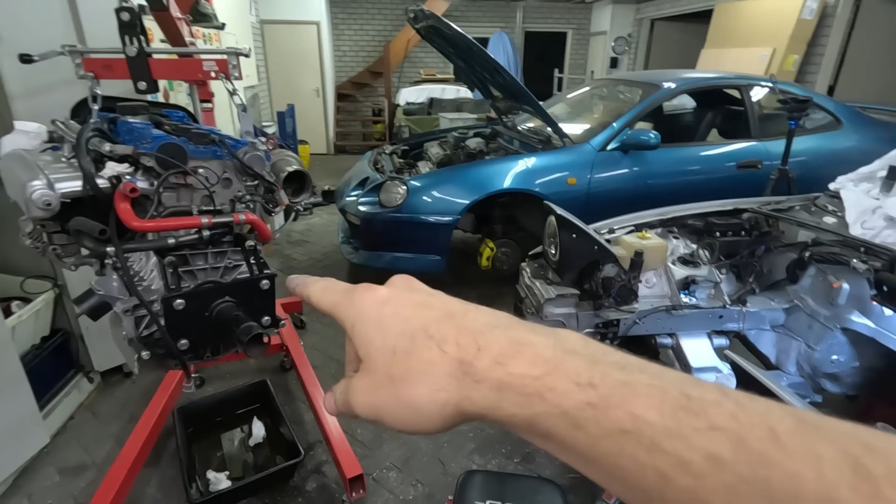It might not look like it yet, but today we're gonna get this engine in the car and get this car on its own power, driving out of this garage. Let's get to it.

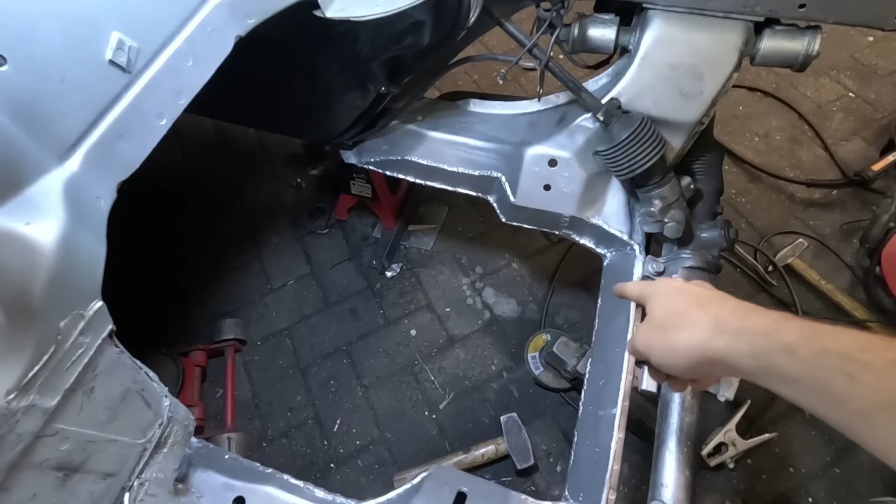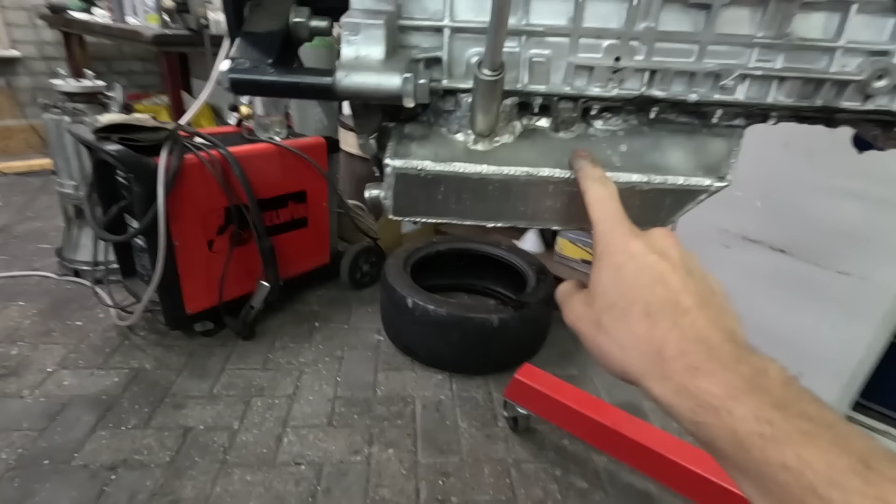Last time you saw us take out the engine and make the brake lines. Thijs has also welded up the subframe, so that looks all nice and neat now. That's actually structurally rigid. And now we can actually put the engine in for the first drive. But first I have to reseal the oil pan. And I'm also gonna 3D scan it. It's not important, the resealing, so I'll just show you guys the scanning of the oil pan.

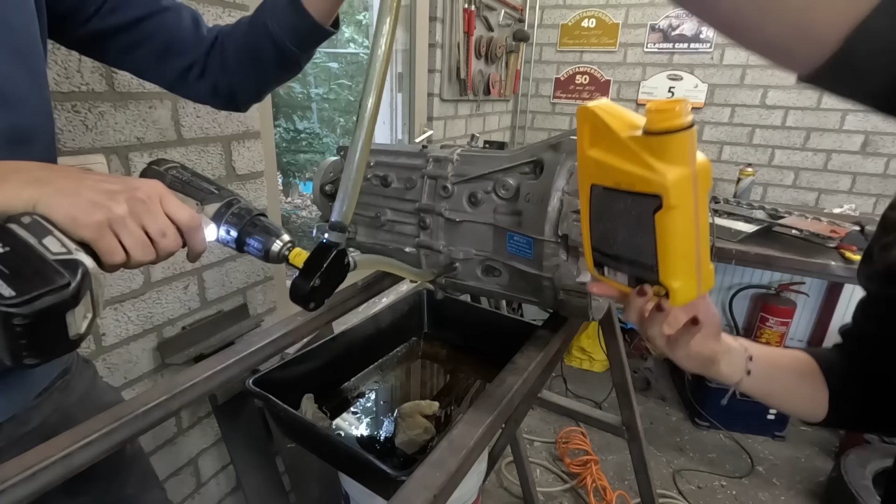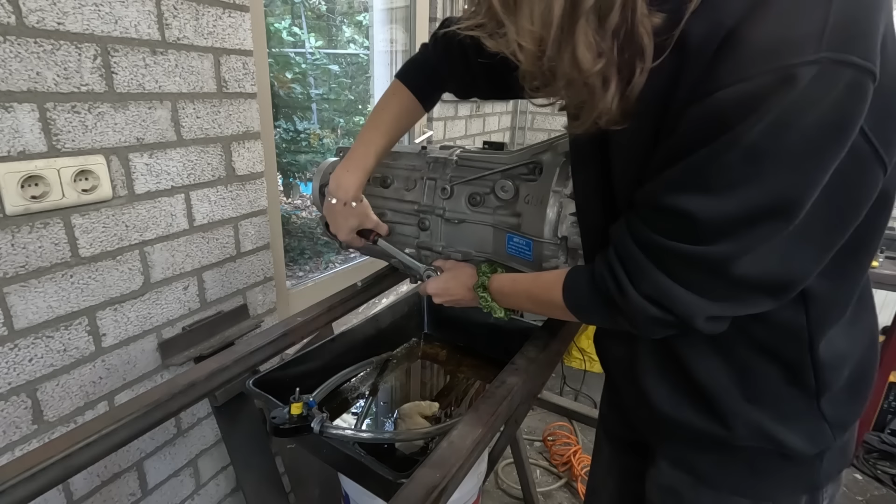That's the new fluid into the gearbox. Use one of these pumps where you can put your drill on, and that works quite good. These gearboxes actually have a lifetime oil, so no need to change it. That's what they say, at least, so they can sell you a new gearbox once it breaks. But they do have a fill and a drain port, which is perfect because we just changed the oil on that, and the oil that came out was actually pretty good still, so that's nice to see.

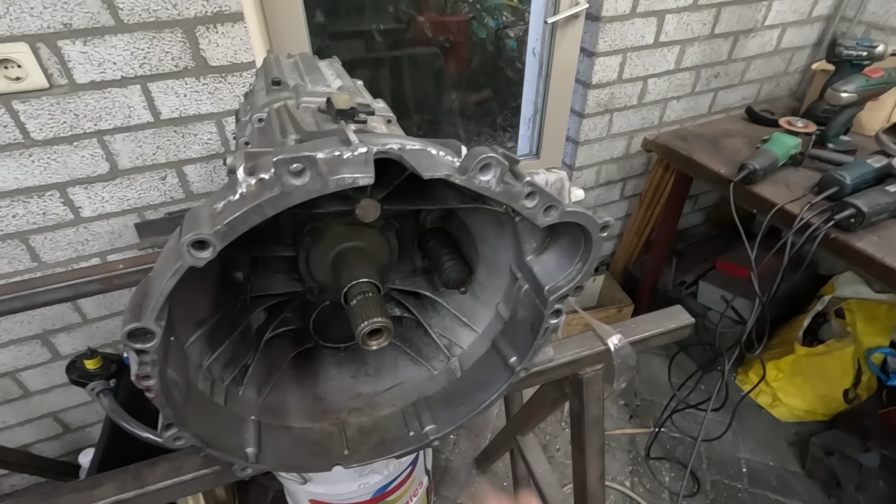The gearbox is now ready to go on the engine with the clutch and the flywheel, so I'll put the engine on the engine crane so I can get the flywheel on, because that's currently not possible, and torque that to spec.

In the first start video you saw that we had some leaks coming from the front of the engine. What I did off camera is actually undo the whole oil pan. What I found out is that the front two O-rings weren't seating properly, even though I mounted the oil pan like this, perfectly perpendicular to the block like it was stock. The O-rings unfortunately didn't seat, so I welded on some more material and made it flush so that now the O-rings will actually seat up to the block correctly, and that it'll seal. So off camera I redid the oil pan and resealed it with Dirko, which is high temp sealant, especially made for oil pans like this.

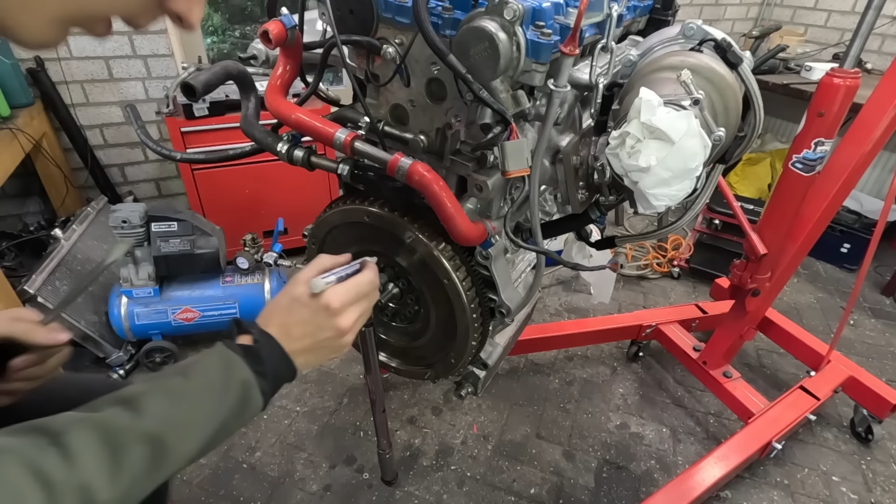So these flywheel bolts are actually 45 newton meters and then 65 degrees. So I've got the angle finder here, and you guys tell me when it's at 65 degrees actually. Oh, I really don't like doing this. 65. Ooh.

So I actually ended up putting a breaker bar at the front of the engine with the giant 30mm nut on the crank pulley nut. And this way I can actually do this alone, because the last 5 degrees are pretty hard to get. And I already did 2, now this one. So the first part is pretty easy. There we go, 65. That marked the rotation.

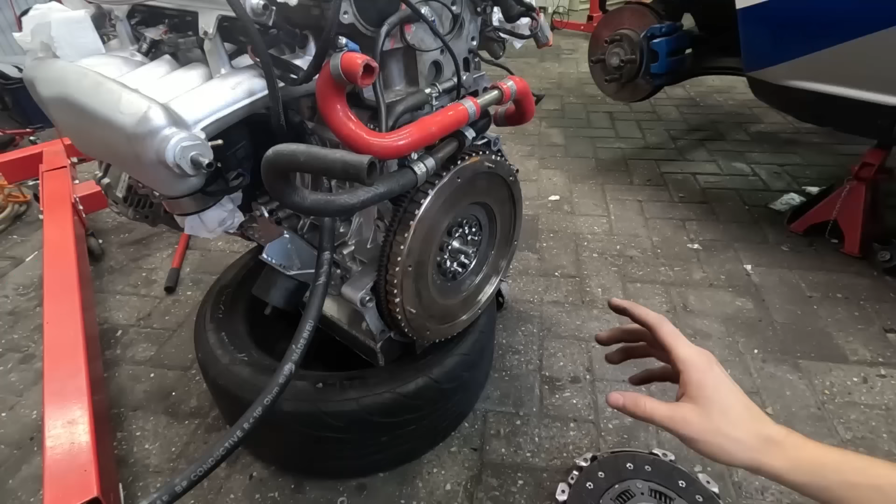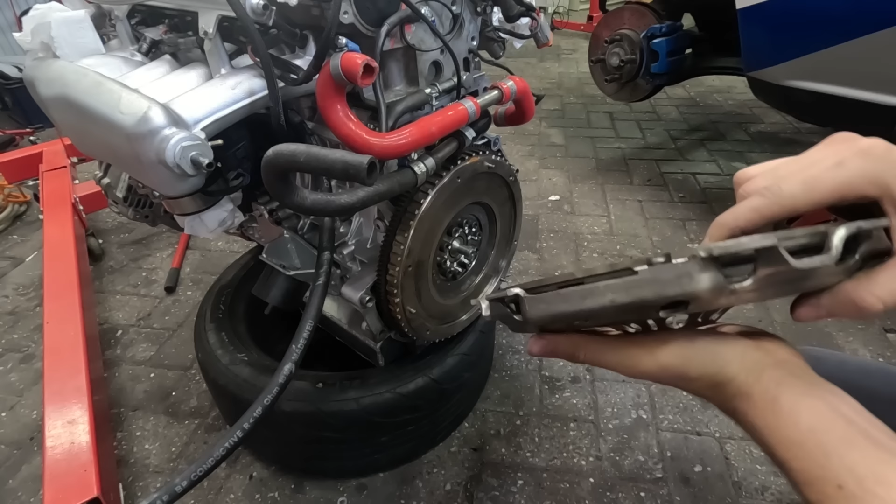This is my clutch setup. It's a Valeo original Volvo 5-cylinder flywheel. It's a single mass converted one, which actually came with the engine, and it has the pressure plate also from the Volvo, as you can see. And in between those, because this is a 240mm clutch setup, I'm using this 240mm clutch disc that actually has the splines for the BMW gearbox. It's actually out of a different BMW, out of an X3, I think. Here's the part numbers.

Because this is a single mass flywheel, I'm using a sprung clutch. Some of the clutches that come with these BMWs are actually unsprung, so I got the one that is sprung, and this should have some pretty nice driving characteristics. To install this clutch, I've actually 3D printed this little tool which slides over the pinion right there. I needed that pinion because it goes into the bearing inside of the shaft of the gearbox. So the clutch disc actually has Getriebeseite on it, which is gearbox side. Slide that on like that. And slide this on like this.

The thickness of this clutch disc is actually about 1.5 mm more than the one that came off the Volvo that was in here, which was new. So to get the same amount of force from the pressure plate, I'm actually spacing out the pressure plate from the flywheel using a washer in between the pressure plate and the flywheel side. So this gives it some more space, so it actually disengages like it did with the Volvo disc, and also engages as it should with the same clamping force, because these are actually the same size as the difference in between clutch discs. So there you go, there you can see the spacing ring. So put that on.

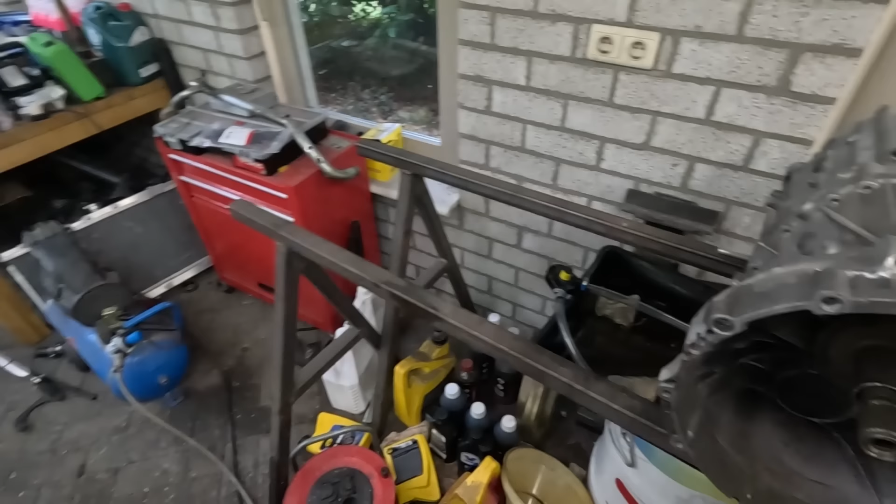Don't do any high load stuff, like no pulls and no hard driving, but I want to confirm that this works before I actually weld the inside, because if I cut it here now, I can still retain the perfectly flat surface, and work from there if I need a different gearbox or something totally different. So we can drive on this, but can't do any pulls or hard driving because I don't want to break these welds. Should be fine for now.

We're going to take out the gearbox, maybe with the engine, don't know yet if just the gearbox or the whole engine setup. And we are going to weld this once we've confirmed that it works. So this is a hard decision I have to make, and I'm taking it cautious because this swap so far has cost a lot of time mostly, and I want to do it right and make sure this concept works before I totally commit to it.

So yeah, let's put the fork on now. So this is the fork, actually clean it a bit because it's still quite dirty, and a new release bearing which goes on like this. One thing I want to check is to see if there's not too much preload on this bearing when it's hitting the pressure plate, because that's how I mounted it when I was originally designing the gearbox adapter thing, and it shouldn't have too much preload because I don't want to slip the clutch.

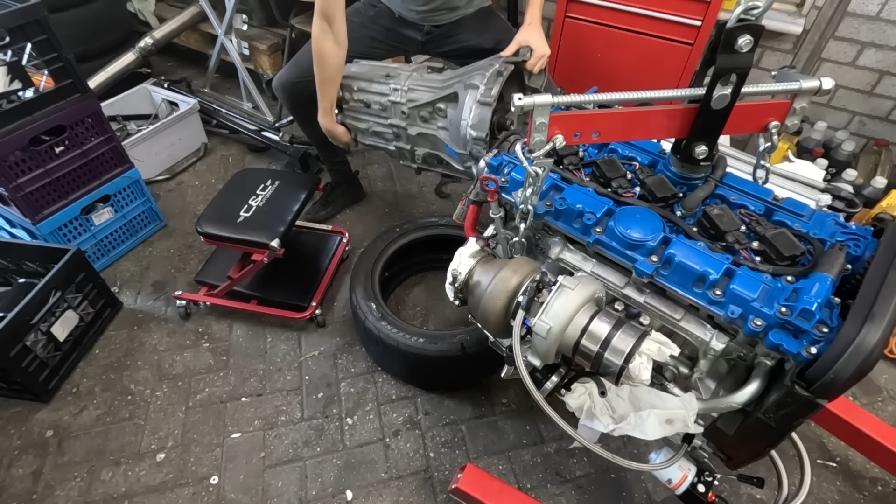Woo! Why did I go for such a big gearbox?

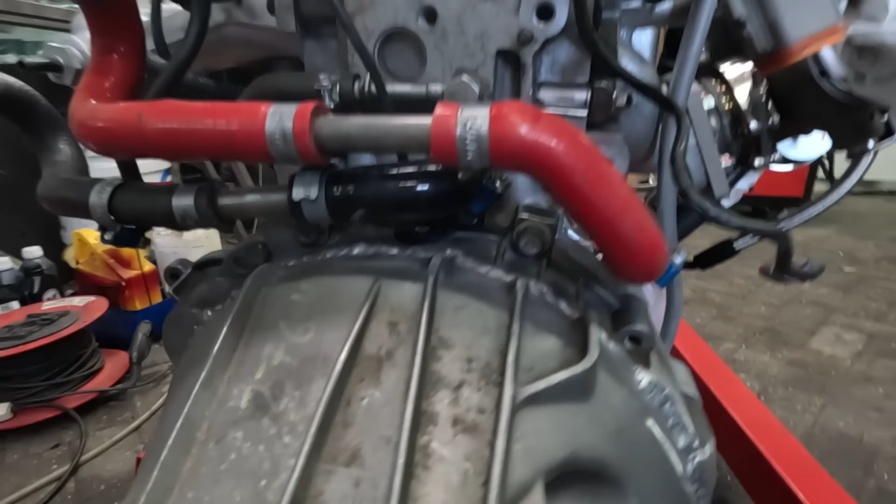One of the things that you don't see often with engine swaps is the time that people take to make it all serviceable. Take for example the bell housing bolts. These are 14mm hexagon ones, but when I was mounting this all, I had some, what are they called, internal hex ones, which are basically these Inbus. So these are the correct length for the ones on the side. So to get that all correct, I got my holy bible, I guess.

I made a little template of the back of the gearbox, and they're all hexagon socket 17mm. So now it's all the same, and this makes it so much easier to actually go and take off the box when I actually need to do that in the car. Also painted them so they're a bright color and they stand out for when you're looking while your box isn't coming off and you see one more bolt.

So all of these old ones, the 14mm ones, can go out. I didn't want a combination of different sockets and stuff, so it should be a lot easier to take the box out later if that's ever needed.

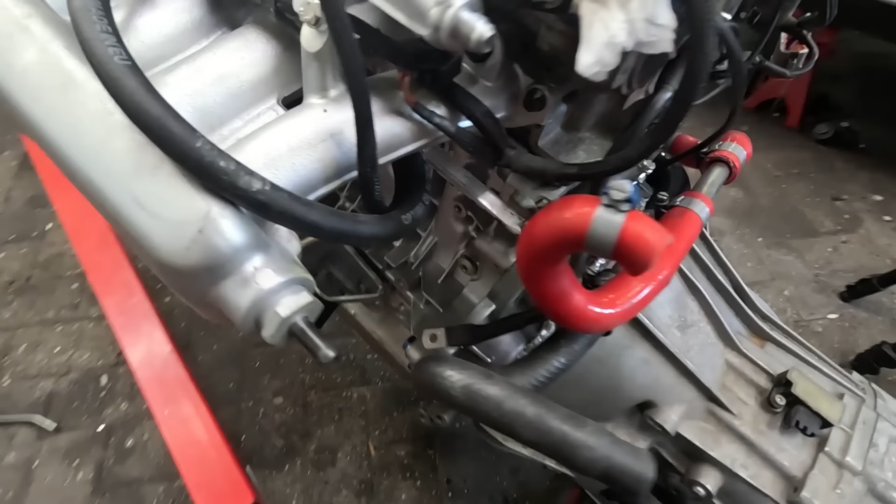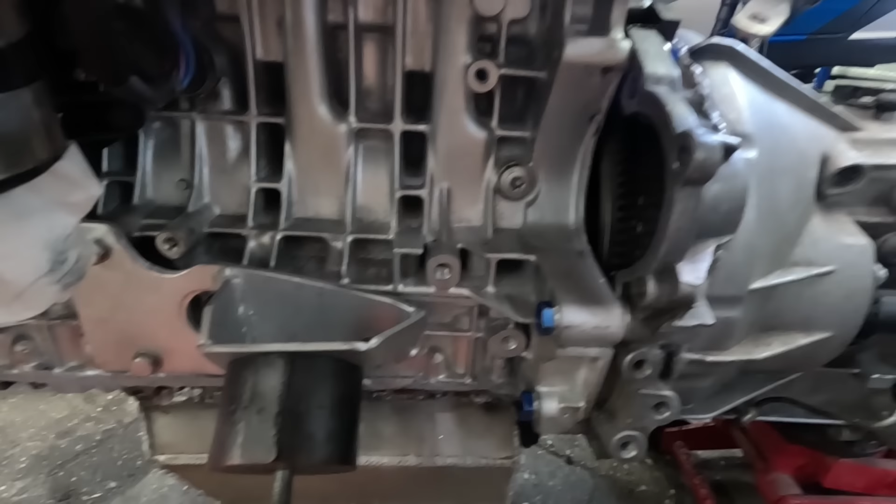Now time to get the starter on. I just checked the preload on the slave cylinder, basically pulled it out to see if it's the same tension as squeezing it with my hand, putting it on. So it's pretty much perfect and I'm happy with that. So we're just gonna send that and put the starter on right now.

Ah shit, here we go again.

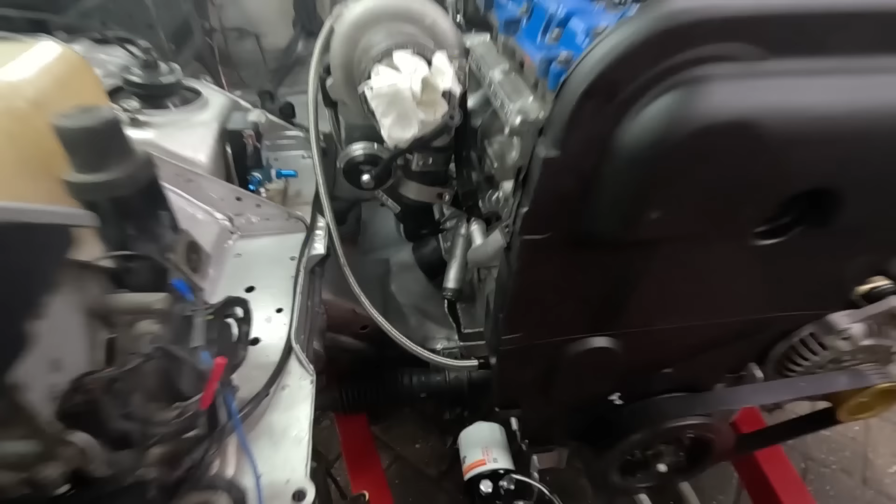That's the poly engine mounts as well in there. They are Shore 85, I believe, on both sides. They made it slightly harder to get the engine in because those mounts are actually 2 millimeters taller than the rubber ones. I think the rubber ones sagged over time. So this should be a bit more clearance to the sump as well.

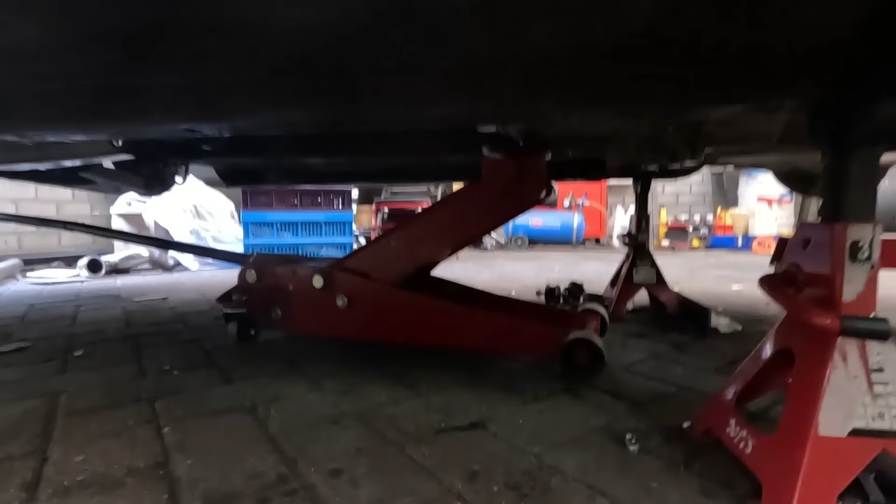And hopefully the hood still shuts. We'll make sure later. But the engine's in, at least on the engine mounts. Now I've just got to do the gearbox mount on the bottom. With the gearbox also mounted, this is still on rubber blocks. I'm going to attach the shifter, which goes to the knob at the top of the gearbox. And I should be able to shift the gearbox now.

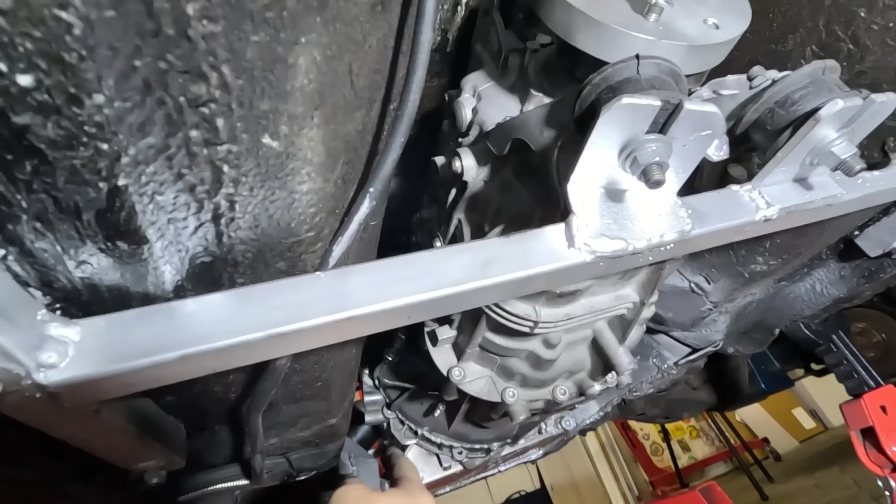And next up, before we connect anything else to the engine, is to hook up this clutch line, bleed the clutch, and check if it disengages the clutch with the actual pedal. So it's basically building pressure, pushing the line, pushing the rod in, and disengaging the clutch, and then this is now in gear. We should be able to move this by hand when the clutch is pressed, and then it's back in gear just like this. It's locked, and I should be able to confirm that now, which is pretty cool.

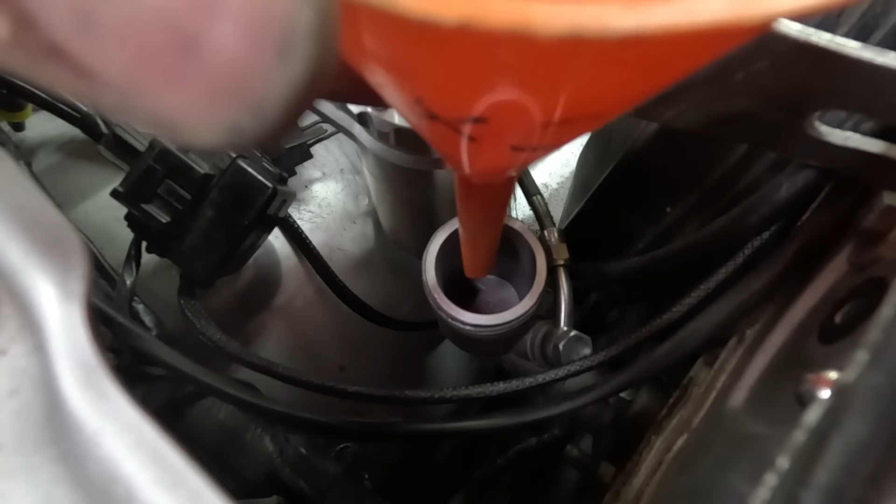The gear shifter is now connected, as you can see, and now the next step is to hook up the clutch line. First self-bleed it, which basically means to fill the canister and keep pumping it until it back feeds into the line. And from there on we're gonna put it to the gearbox, to the slave cylinder, and it should be working. Let's see if there's any leaks. I hope not, but we'll see. This should work. I'll pump the clutch now. See if this works.

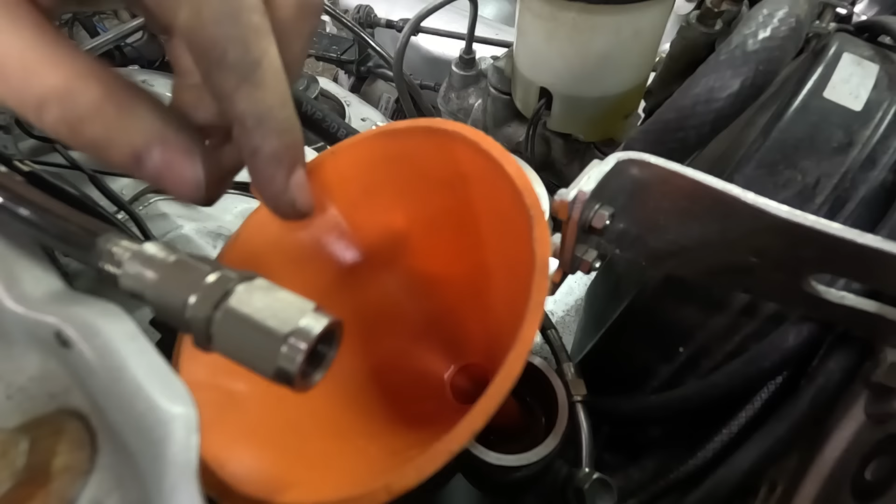Oh! Basically shot at the firewall. Shit. Let me get some towels. Brake fluid. This is really nasty stuff, so need to clean it out as quick as possible. This will eat your paint and stuff.

See if there's still enough in there. Fill it in a little bit. Ooh, that's way too much. Whoops. Let's see how far it's dropped. Pretty much nothing. So that's way too full. Whoops. Then next, gonna tape up the end. I really don't want that to leak all over everything. There we go. Put this down to the gearbox, and we'll bleed it from there.

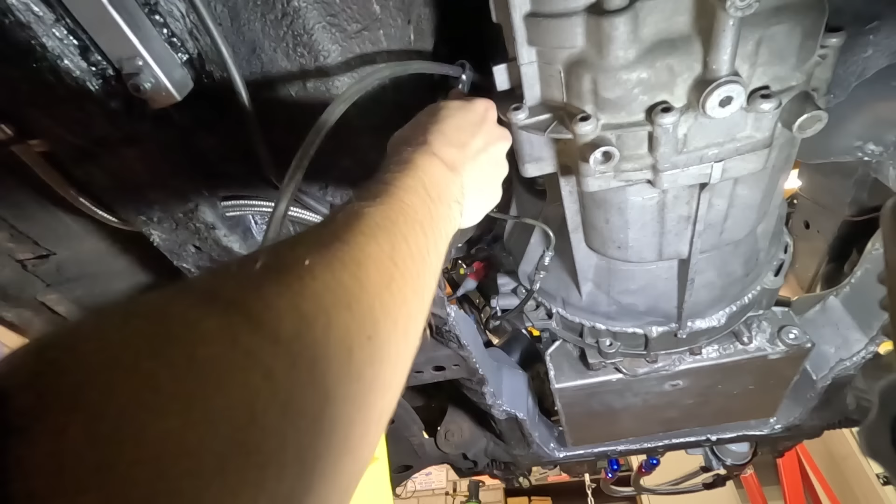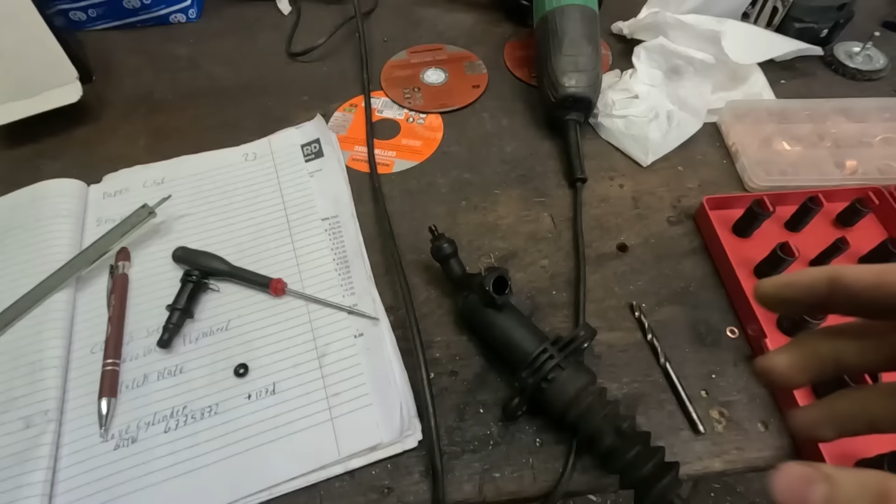Piece of shit was leaking there. This is the slave cylinder from the BMW gearbox, and it has one of these, which is basically a damper inside. So when you push the clutch, or when you let it go actually, it limits the amount of flow. So I deleted that part inside, so it's realistic, so you can actually clutch dump it and stuff. But it has this small O-ring in there, which is actually upside down.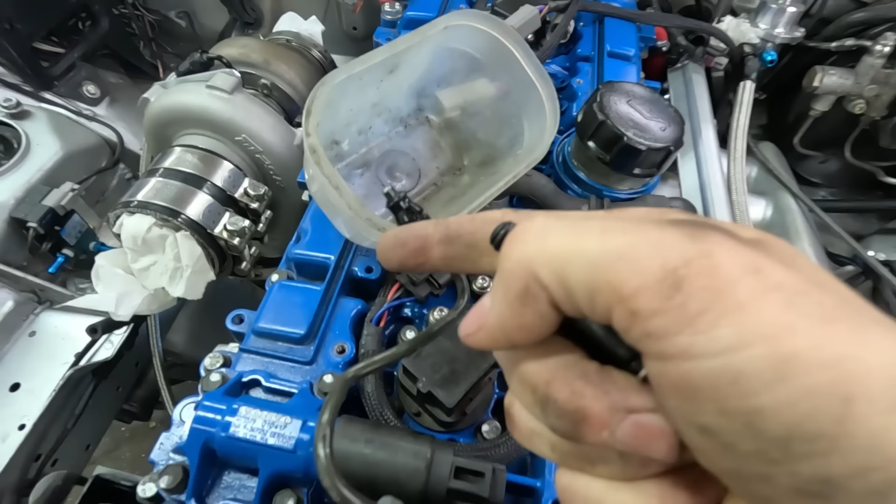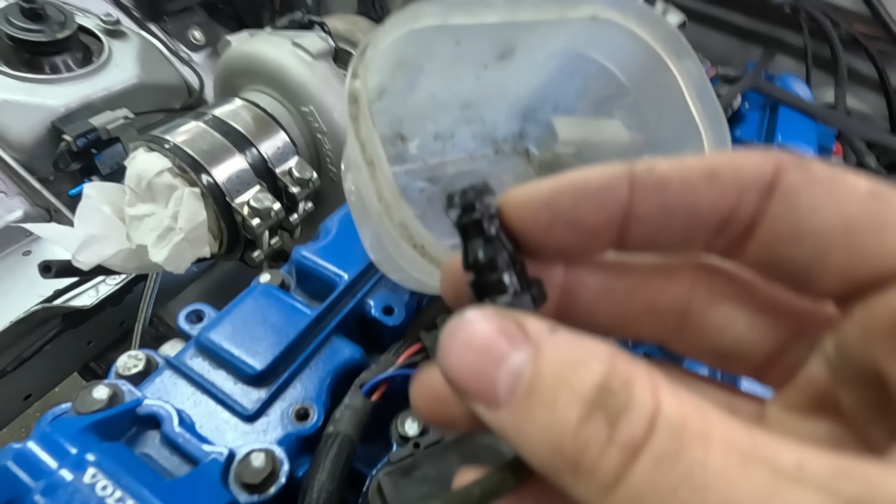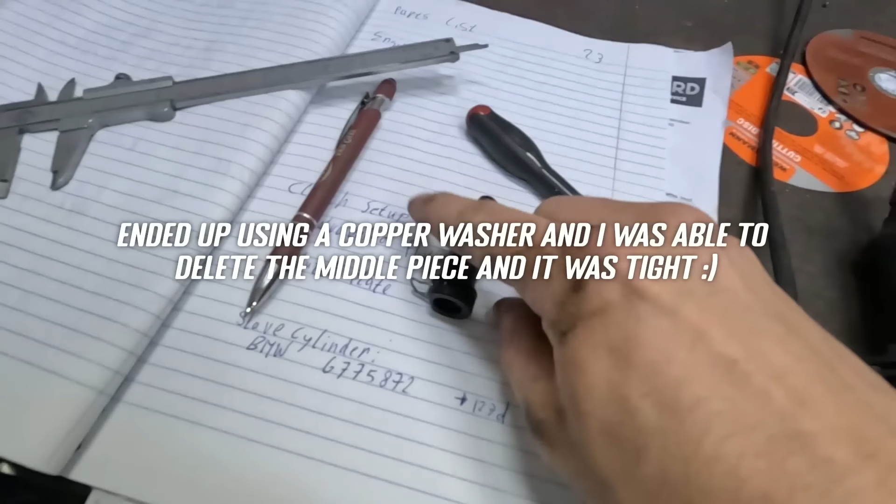It's on this side, but the ends aren't the same, so I can't just put this part into the slave cylinder. I need the part in between, which is kind of a shame. And what ended up happening is, because I deleted the part inside, now this has a gap in between. It should be like that, but it has a gap of about a millimeter, and I think this is what seals it. So I'm gonna try to find an O-ring that actually fits inside this part and makes it seal better. Ja.

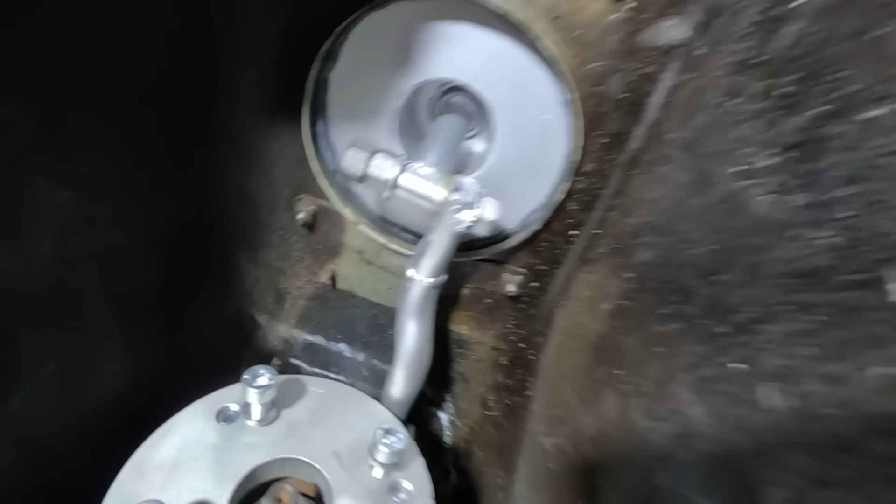One more thing I noticed is that because I have this rubber ring in there now for the shifter, it's now hitting at the top, not being able to go into second gear now. So I'm gonna mark this out and hammer it in some so that the edge doesn't exist anymore.

But before I start it, I actually want to regain oil pressure because I've had everything apart and the oil system has been pretty much cleaned out and put back in. So I want to take out the coils and the spark plugs so I can turn it with the starter without making compression, so it's less hard on the bearings.

And I'll put them back once I've actually established that I have oil pressure, which in this engine took a while in the beginning, so hopefully that's better now with the oil filter location lower. So I'm gonna take these out now.

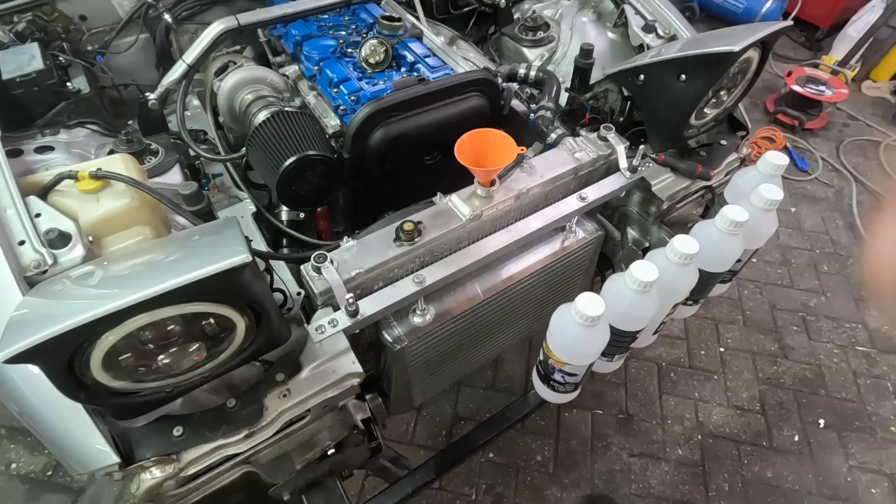Time to also fill up the coolant system. I'll do that right now. Seventh liter. Yeah. I kind of expected it to start coming out before the 7th liter, but sure, we'll see. Oh, there it comes. Just this much. See, it's full.

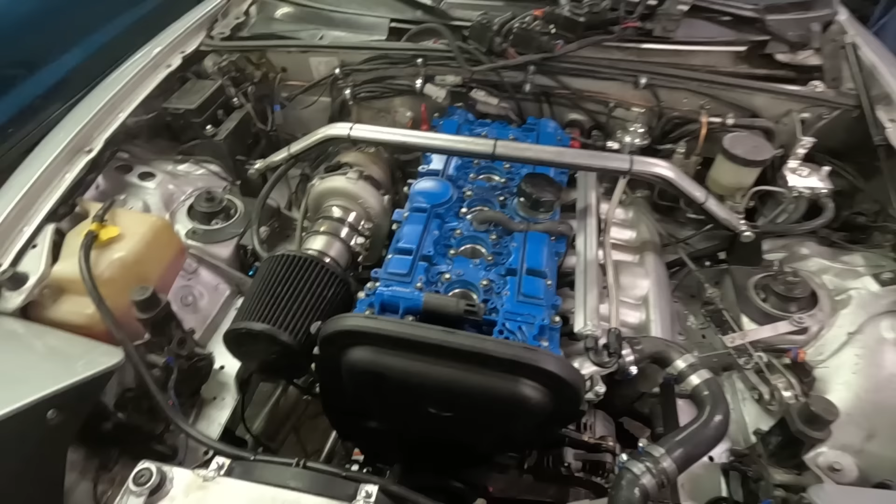No leaks so far. So there you go, that's 6 liters and a small bit, and it'll probably have to cycle some, so I think that almost the 7th liter will fit, but we'll see when we get there. So the spark plugs are all out, the oil is up to its level and the coolant is in.

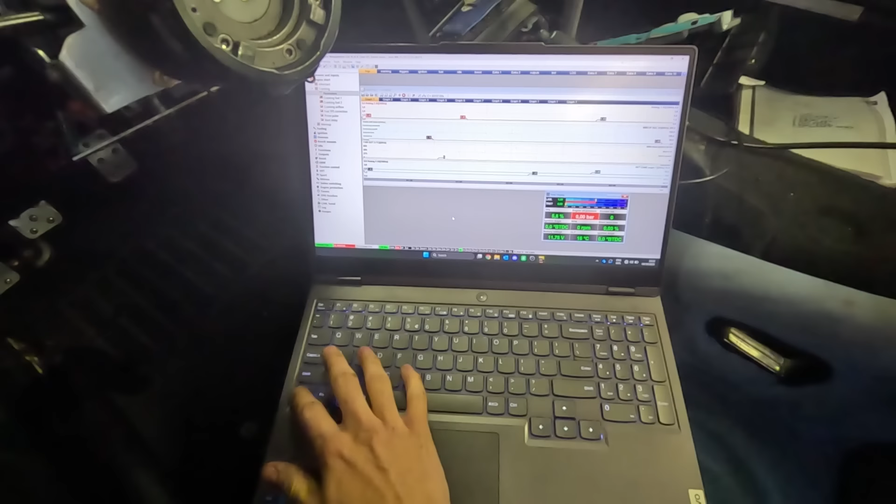I've actually hooked up the ECU and I actually have to upload my newest project file. So I cleaned up the file and it should be updated now. There we go. That's made permanent. And yeah, it's giving me one check engine light for oil pressure, but that's because there is no oil pressure at the moment.

But the sensor is working, because if I look at analog 1, that's the sensor for the oil pressure, it's 0.49 volts. Oh, and I just saw the wideband kick in, which means if I go to WBO, it says lambda is valid, yes. But that's not important for now. I just need the oil pressure.

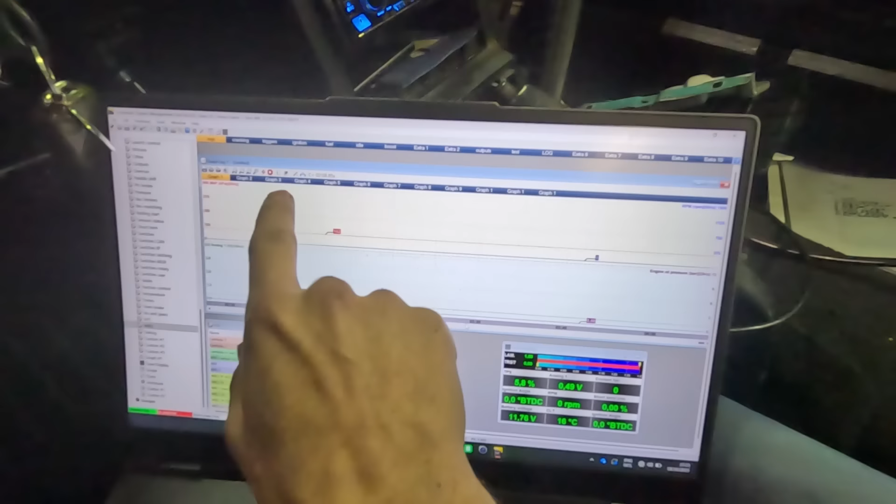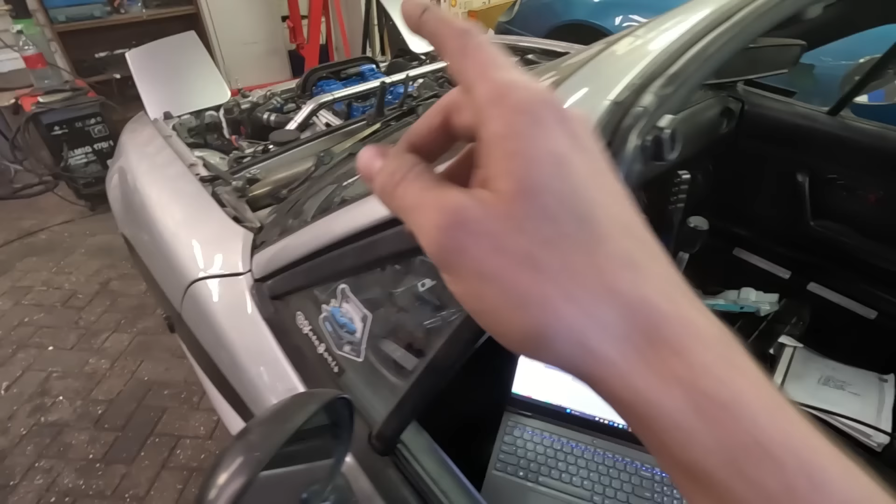So set the logger to MAP and RPM at the top, and analog 1 voltage, which is the sensor voltage for the pressure, and the engine oil temperature. So yeah, nothing more to it than actually to crank it. I'm actually interested to see how it sounds with the poly mount, so we'll see that right now.

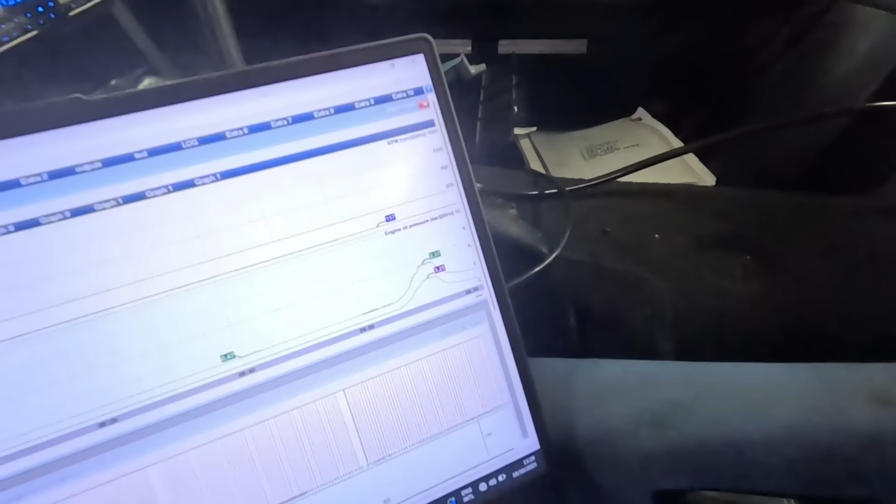So no pressure yet, maybe the slightest bit, but give it some more. Actually, I'll check the oil level. The level's still good, so let's try to make some more pressure. There we go. It made oil pressure. You could hear the oil actually building pressure. There you can see it made it to 3 bars, and if I do it again, it should go pretty fast.

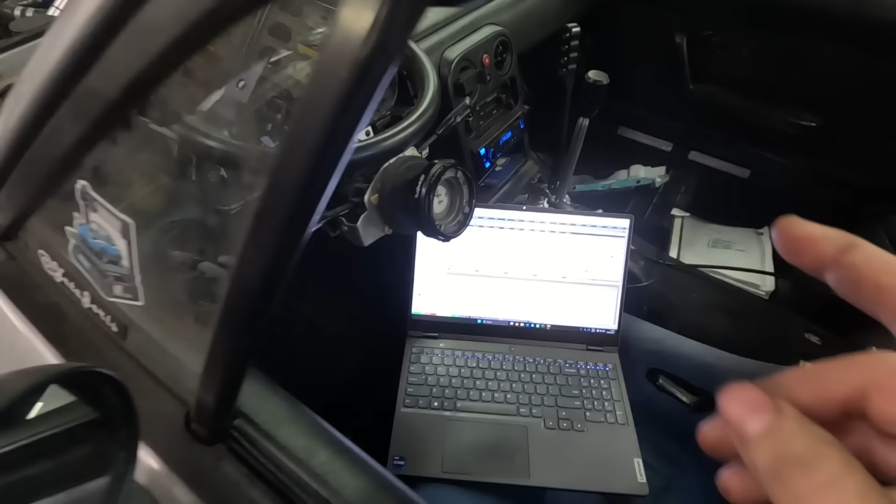So that's oil pressure. Let's put the spark plugs back in and put the coils on, and it should fire right up. This for sure has to be my favorite part, honestly. Perfect. I mean, it just finishes everything off nice and perfect. That's insane.

Do keep in mind that this front won't actually clear the hood, so I'm going to have to trim these 2 pieces, the stock ones, to make it fit better, which is going to be cool, because we're going to have exposed cam gears, but only when the hood is open, so it shouldn't get any junk in there, and it's going to look sick. I mean, just look at that. That's sick. Now to get these bolts on for the strut base, and I should be done.

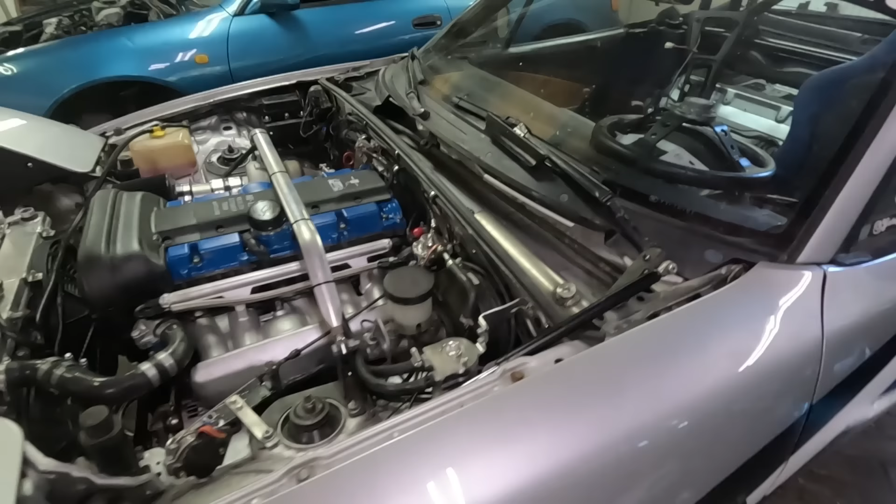When I was cranking it, I also did a quick trigger check, and that looks perfect. You can see where it's trying to fire and where it's injecting. I should actually move this over a bit because that's not realistic. There we go, at the end you can kind of tell. That's the crank, that's the cam, that's perfect.

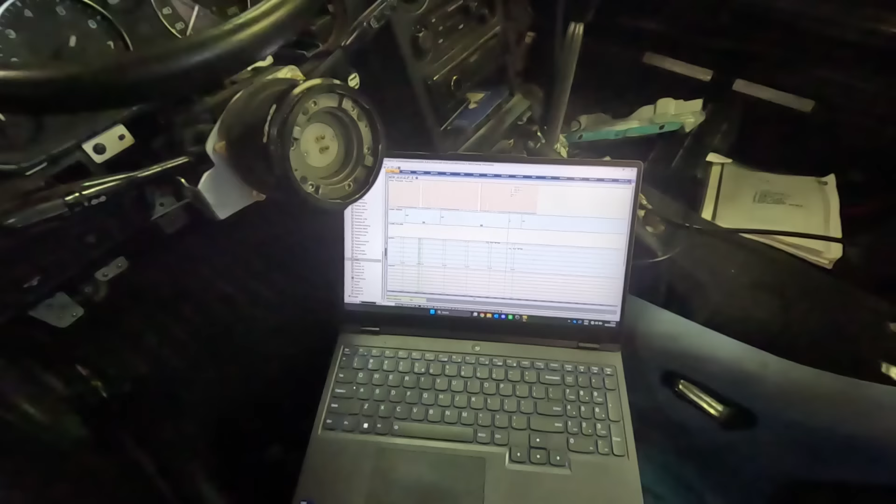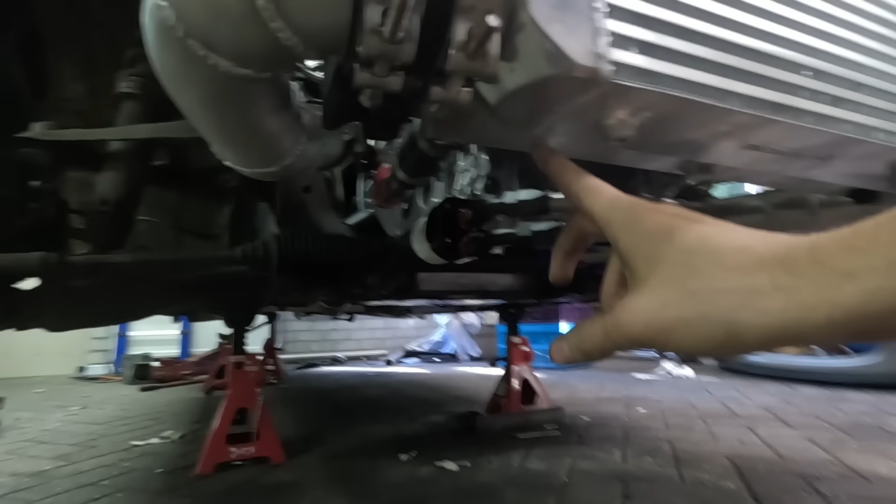So one last check if I have all the oil in there, and I did see a tiny, you can kind of tell here, a tiny coolant leak, which is coming from the welded on piece of pipe on the radiator, but that's a problem for later. As long as it's only a little bit, it should be fine. So yeah. Need to start it now.

One more time. Just needed to prime the fuel system, I guess, or something. There it goes. Almost. I'm afraid I'm gonna have to give it some gas though. There it goes, just as easy as that.

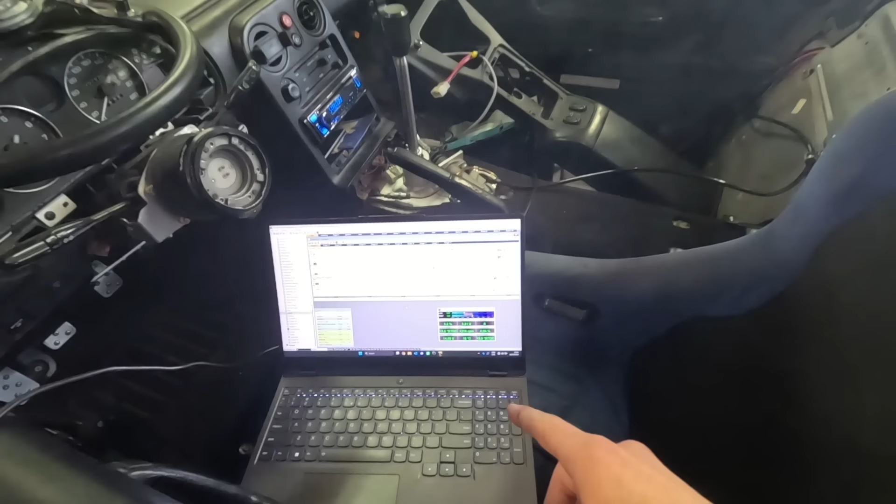So next thing, what I immediately noticed, so that's probably because I threw some oil in the cylinders and it's been upside down, so don't worry about that. What I immediately noticed is that I got some vibrations on the gear stick, which is probably because it's actually hitting.

So I'm just gonna start it, and because there's very low resistance, you should see the output shaft move, and I think it's actually hitting the shifting shaft. So we'll see if it does that, and what else we have to modify to make it clear. So I'm gonna start it. Here it goes.

So yeah, you could see, I could also tell if I put it in third gear, it was actually hitting. So that means it's time to modify the shifter linkage, because it has a little lump going down. That's original, I haven't changed that, but the adapter ring that's there for the drive shaft actually hits it, because it's the same side, just it hits the dip. So I'm gonna take it out now and see how we can make it so it's slightly higher.

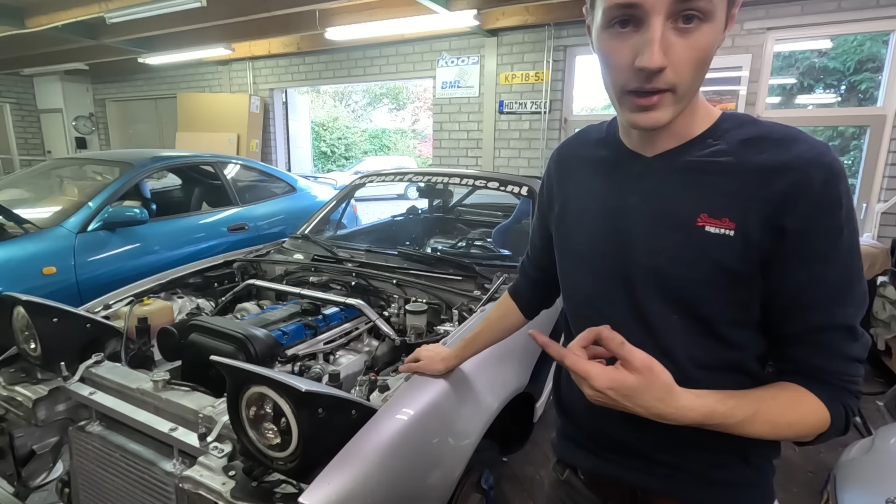Okay, so two things have happened. First, you might actually notice, because you just got from the previous footage, I turned it around. So this used to be 180 and then turned. So this was the higher part and this is the lower part. I thought that made sense, but apparently this is way better.

The only thing I had to modify was actually, see this little thread from the screw that's coming from the top. I had to cut that out here so it wasn't hitting, and it basically clears way better than the previous setup. We'll just have to see how it does with the drive shaft in place, but I'm not too worried, else we'll just raise this and make this straight. So it should be easy to fix that later. And I think this is actually the orientation that it had from stock, because the thing in the back is also offset. So now that clears way better.

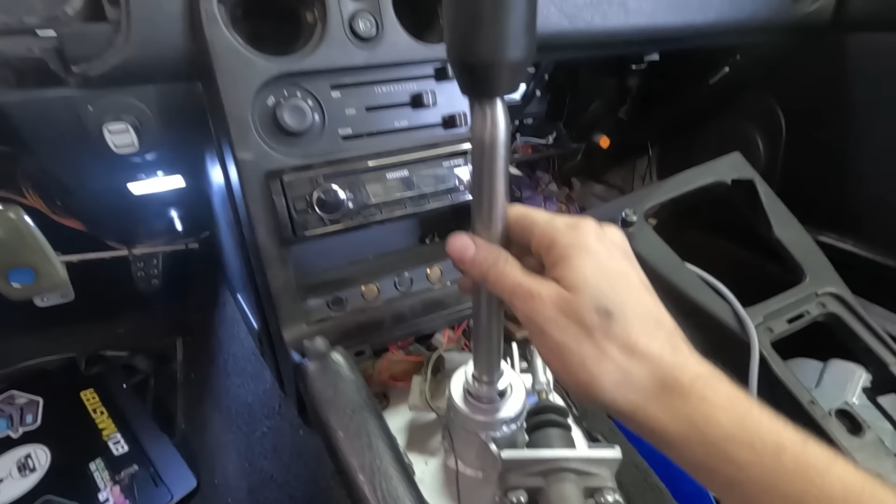And one more thing that I noticed, these gearboxes have a first and then a reverse beside it, to the left, so it's 1, 2. You have to really put some force into that. But what I noticed is that I have this slip ring on here, so that the shifter can't move like this. So if I had that all the way down, I thought that I couldn't go to reverse because I was hitting the bottom of this pipe at the bottom, but that's not the case.

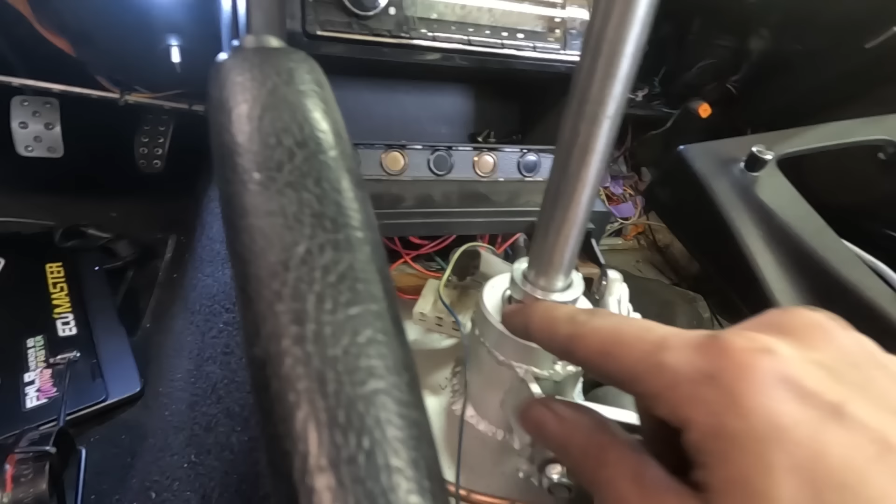So if I do this now, it's like press down. So there's now play at the bottom. If I actually go to reverse, you can see that it comes out. See that? Because it's hitting right there at the left side. So I might need to make a little spacer or something to make it not hit there, and then I can get the play out and actually go into reverse. So that's pretty cool.

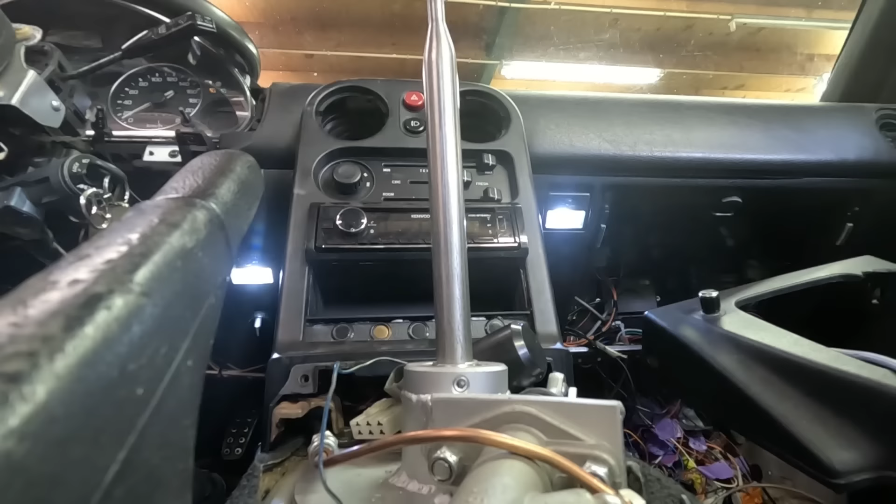So adjust the left side, so it doesn't support there anymore, which is fine because this half still supports it from going up and down, but just allows it to lever like that. Pull it all the way up. And tighten her down. That's sick.

Yeah, that's perfect. So now you can see there isn't a gap here, which previously was the case, and now it's all the way down, so the play is gone. There's like minimal play. That's mostly the ball in the joint. But yeah, that's pretty much perfect. So that's reversed as well.

Put the shifter on. And I'll put the interior kind of back, like nothing ever happened. I just need to mark where this goes, so I don't get the orientation wrong, and I can keep my reverse gear. So, time to start it up and see if all of the gears function normally. And yeah, I'll go 1 through 6 and you guys just tell me if it keeps speeding up.

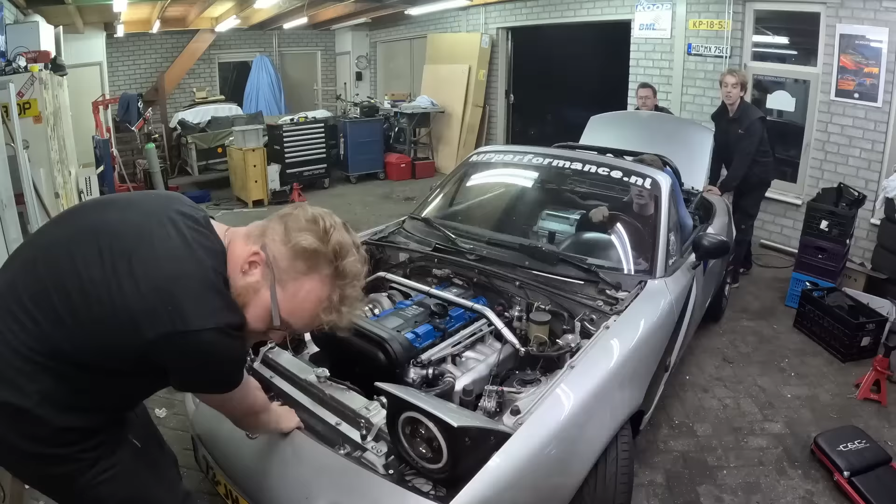Gaaf. Holy shit. Freaking. Don't know why it's.

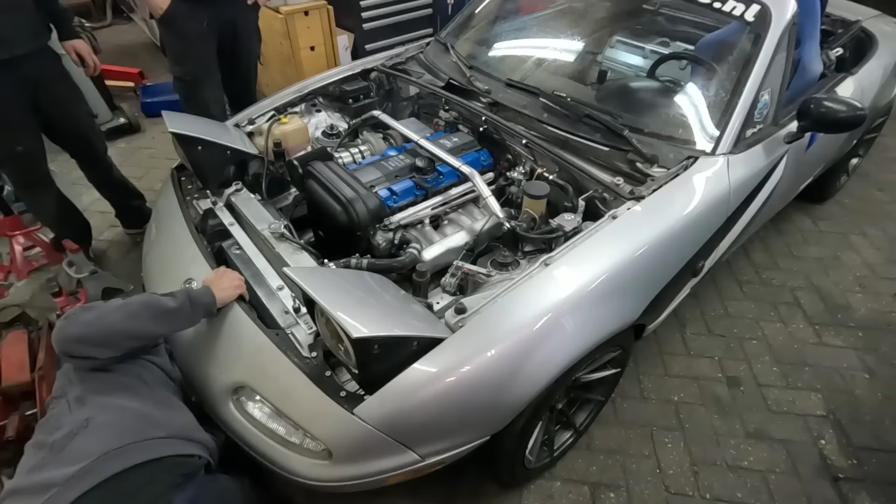Okay, we have a small leak. You can see some oil on the subframe. That's from the dipstick not seating correctly. You can kind of see the O-ring right there. So that's puking out some oil, and the fittings at the front might need to be checked. But so far, what the fuck?

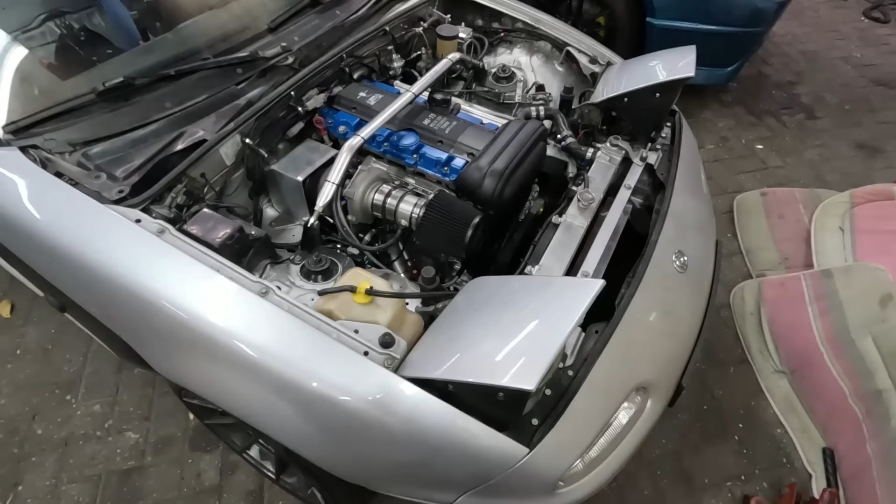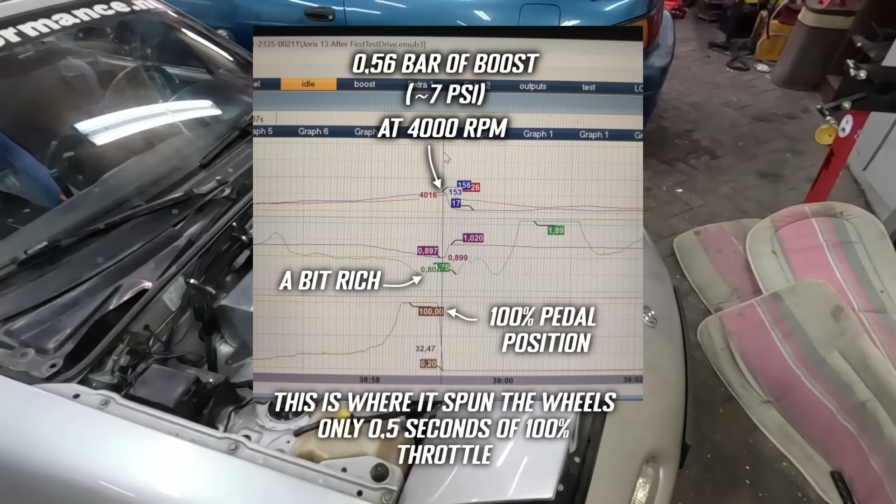The engine ran pretty good. I have a log on the computer, I'll show you an overlay. I basically hit half a bar of boost. I actually did send it, but I wasn't planning on doing that. I ended up sending it a bit harder than I expected, but it held up pretty good. And next up is fixing all of the issues, but that's a successful first drive.